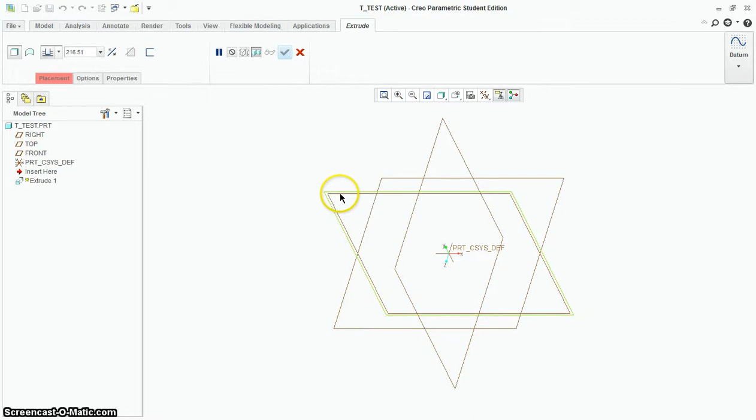So we're going to go ahead and go new, and this is going to be the T, and I'm going to go ahead and call it T test, just so we can try it out. And it needs to be a part. Click OK, and we're going to extrude. We're going to draw on the front plane, and we're going to click on sketch view, which is going to orient us to look at the front plane. And now we're going to use a line chain to rough out this shape.

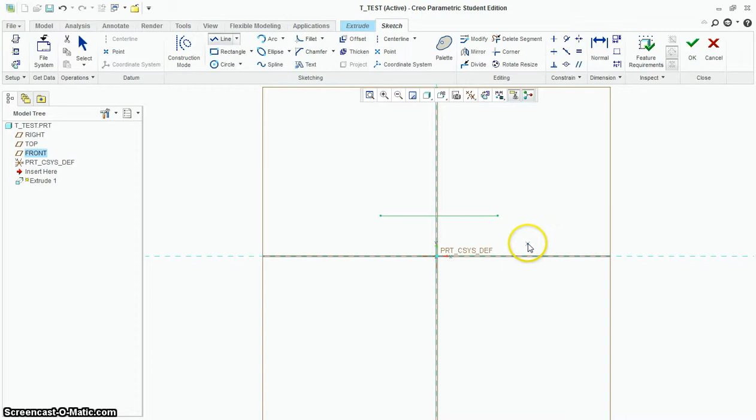One technique I like to use: you could just draw the T, okay, and you would have no idea how big you're drawing it. And then when you try to dimension it down or up to the correct size, it'll give you some trouble and it'll look not like a T anymore. So one thing that can be very handy is to go ahead and draw one line. Alright, so let's just draw one line in here. And let's go ahead and dimension that line. Let's see how big this is. And it's actually pretty close to what we need.

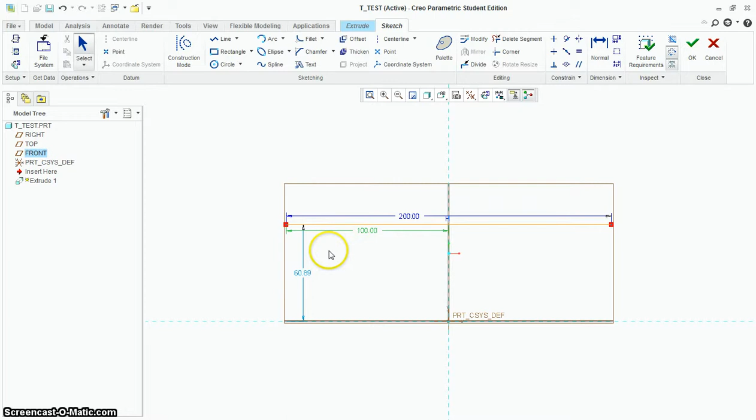It's 171.35. I need it to be 200. But by me making this 200 right now, I'm just making sure my drawing is to scale. And then as I rough out the rest of the shape, everything else will be very close to what I need it to be. So I'm going to go ahead and center this on the plane. I'm going to make this 100. And then what would be a good idea here? What about the thickness of the top of the T, which is 50? So let's go ahead and make this 50. And that just puts me in a really good position to rough out the rest of this T.

So now when I go to my line chain and I draw the rest of this in, I'm going to be a lot closer on my actual drawing. Now some of it will be wrong, but a lot of it will be really close. And then you can see it's closed, it's shaded in, and then we just got to change the rest of these numbers. I got a bunch of numbers that are already correct. You can see that it says L1, L1 here.

That's actually good because these are equal, and so this means line 1 and line 1 are going to be equal. If for some reason you didn't want these equal, you would have to change that now and get rid of that constraint. And the way you would do that is get your selection tool up here, click on the L1 and highlight it, and then hit the delete key, not backspace, but delete key on your keyboard. But in our case, we do want it.

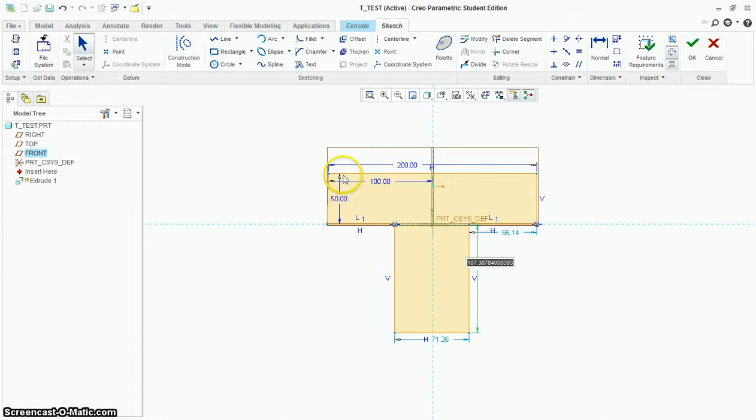So we'll go ahead and make the height here at 100. A lot of kids accidentally type in 150 if this dimension pops up. That's because the total height of the T is 150. So you got to do your math. So you got to go 50 plus 100, total height of 150, and make sure you get these numbers correct. So there's 100. The width at the bottom is the same as the height of the T here, so 50. Okay, and you can see, what happened there? Well, we got to make some other changes here to make this correct.

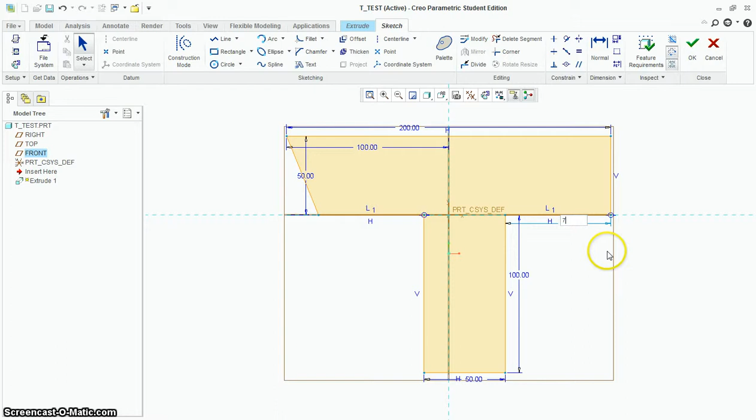So now we have a math problem. What's this number going to be? Well, we can do that. 200 minus 50, what do you get? 150 divided by 2, because we want these sides equal to each other, is 75. So let's make this 75, and then let's look at it. Yep, looks good. Okay, accept it.

Make it whatever thickness you want the T to be. Let's make it 50, just like the width of the T, and accept it. And that, after you save it, is the end of the T for extrude.